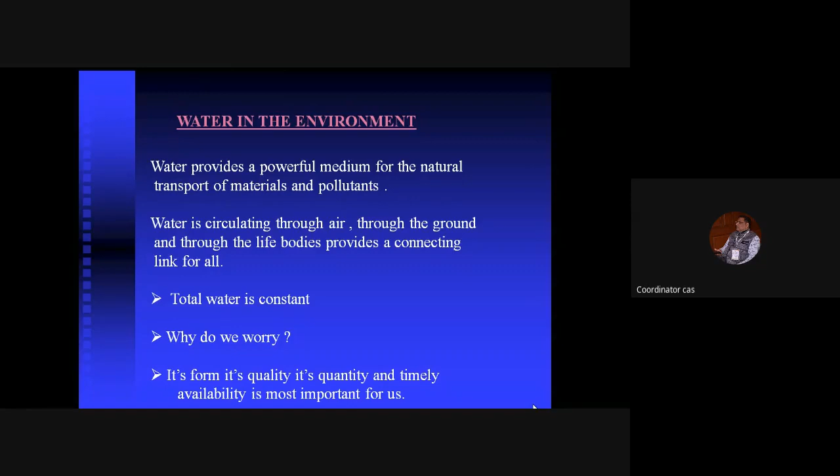Okay, let us go for the next slide. Next slide, please. You can see this is the hydrologic cycle. I think unfortunately I could not play it from here.

So the water evaporates from the seas. You can see the ocean to my right side - it is ocean MSL, representing mean sea level. From this ocean, a huge amount of water is evaporated due to the sun's energy. Not only from the ocean, even from the continents - you can see the continents with up and down topographic elevations, and trees from the many water bodies on the land, on the ocean. Every minute, every second, continuously, due to the sun's energy, water is getting evaporated.

You yourselves also - while I am talking, I am exhaling a lot of moisture. So like that, trees also give a lot of water when they suck water from the ground and then release water to the atmosphere - that is called evapotranspiration. Evaporation from the soils.

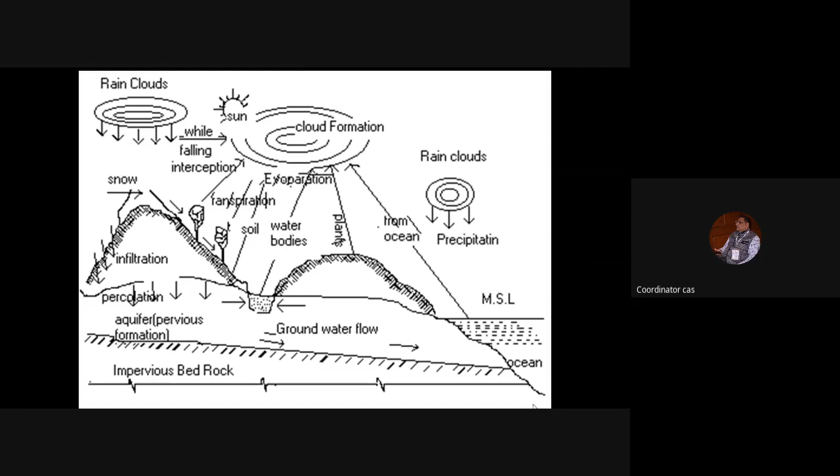We cannot bring the water from far away - I will show you sites later on. Okay, so let us have the next slide. This is just a glimpse of the world's water resources.

Of course, don't bother about that big figure, but look at the top - 97.2% of water is salt water, that is in the oceans, so you cannot use it. Though it is a blue planet, full of water everywhere, most of the water we cannot use. Of course, nowadays with RO and all, we can make it usable for drinking, but it's very expensive. For regular use like irrigation and other drinking or other uses, you cannot directly use that salt water.

So what is the fresh water on the surface? It's just 2.2%, out of which groundwater is only 0.6%. But out of the total fresh water, most of it now is in the glaciers and ice caps.

2.15% of fresh water is in the glaciers and ice caps, meaning most fresh water is in the north or south polar regions. Of course, the Himalayas are also called one of the poles because of its height and glaciers. These glaciers are getting melted, but still much of the fresh water on the surface of the earth is in the glaciers.

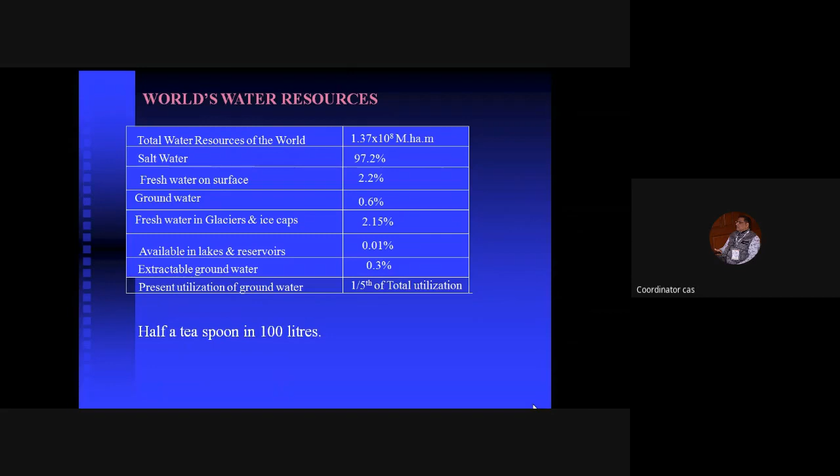Next slide please. Yeah, this is India's total water resources.

Mean annual rainfall has a huge variation. 1,100 mm is our average annual rainfall of the entire country, but it varies - sorry, 11,000 mm in Cherrapunji, not 1,100. Of course, Cherrapunji is no more the highest rainfall; normally we learn this from textbooks but the place has changed now. It varies from 11,000 mm somewhere in the northeast to just less than 100 mm in western Rajasthan. You can see such a huge variation - it is not uniform throughout the country.

That is why we need water management - we have to transfer water from somewhere under floods. Even the northeast gets floods; whether we can transfer from there or not is a different issue. The Ganga basin has some floods, even the Godavari has floods - any river basin has some floods, and there are some droughts. So it's not uniformly distributed - there's a huge variation, the spatial distribution of rainfall is not uniform. If the spatial distribution were uniform, there would be no need of any reservoir or supply structure - everybody would get equally and could simply have a small storage structure to utilize it. That is why we need dams, that is why we need structures and so on.

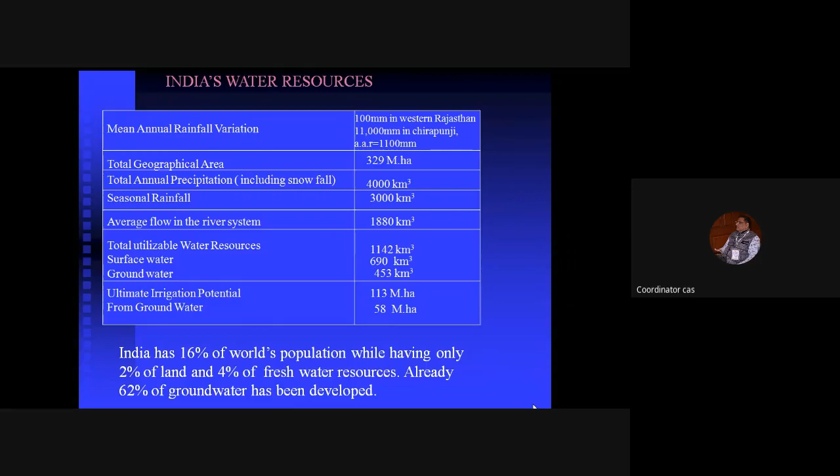Compared to the average annual rainfall of Saudi Arabia of about 150 mm, our rainfall is much higher. You've just seen 1100 mm. Saudi Arabia lives with much higher standards many times over, using desalination plants for drinking water and managing other needs. Israel is also similar, with almost the same amount of rainfall.

Whereas you are having 1.21 meters height of water above your entire land. But of course, most of it falls during monsoon, no doubt. Definitely, this calls for storage.

We have to save the environment, no doubt. But for those who say dams will spoil the environment, I cannot unfortunately agree. Dams do disturb environmental balance to some extent, but in India's case, there is a necessity for storage. The storage can be in smaller or bigger structures—that is left to you. Storage is needed because the entire monsoon gives 75% of the total rainfall.

As per international norms, per capita availability of water works like this: if it is 2000 cubic meters, you are coming to a critical position. If availability is 1000 cubic meters, that's very low availability, and 500 cubic meters is the critical lower limit. That is the per capita availability of water. Let us see how we fare, where we are.

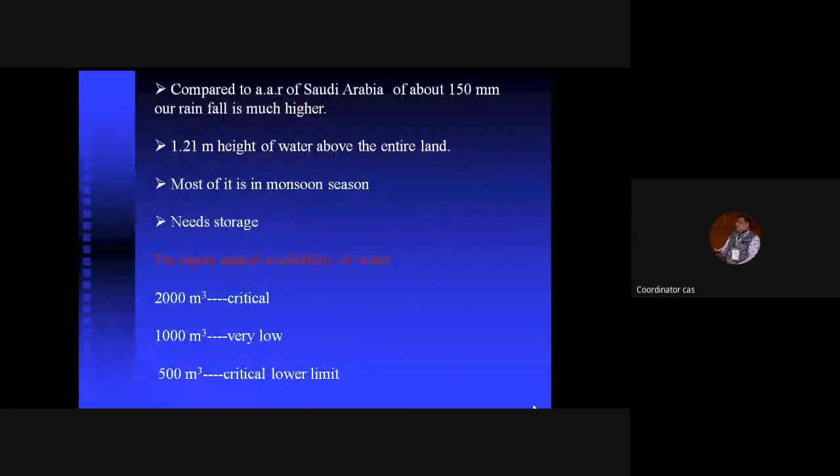Next slide, please... I think you might have skipped one slide ahead... Okay, go ahead, next slide.

Water allocation priorities in the National Water Policy—earlier 2002, let us compare with 2012. From time to time the government of India revises this. Water is a concurrent subject, meaning both states and the center have jurisdiction. State governments can act only within their own state's water resources, whereas the central government has overall control, stepping in whenever two states are fighting, and it can also fund various things. Then there's drinking water and irrigation.

You can see the main headings of the 2002 and 2012 policies. Earlier we were bothered about quantity allocation—mostly supply side management. Whereas in the National Water Policy 2012, many new concepts have come: the Water Framework Law, adaptation to climate change, demand management instead of supply side management, water use efficiency, water pricing, preservation of river corridors, and the rural and urban water divide. So there is a huge policy change.

Earlier, we used to supply whatever water we planned, constructing dams and doing so many things. But now we have to do all these things under the framework of a law, considering the environment, efficiency—how much efficiency you are using—and how much you are preserving our environment, what is the urban-rural divide, and so on. I can give an entire hour's lecture on this, but let us go further.

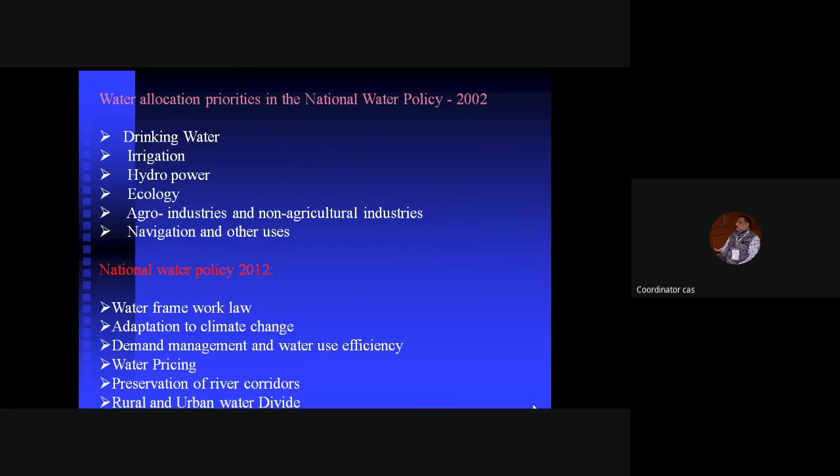This is a rainfall map - the blue color represents the highest rainfall over our country. The Western Ghats have very high rainfall, almost 3000 mm. The Northeast, the Ganga Basin, Mahanadi Basin, and parts of Bihar and Jharkhand also get high rainfall. Whereas here in Hyderabad, you are in a rain shadow region, so your rainfall is somewhere around 700 to 800 mm.

See how this Indian landmass gets rainfall. There are two types of monsoon. One is during this season - the southwest monsoon travels across India. One part directly dashes the Western Ghats, the other part takes a turn and travels across the eastern coast up to the Himalayas. That's why the Western Ghats receive maximum rainfall, and as it travels across the mainland and touches the Himalayas, the Ganga Basin and even central India get very good rainfall. Because of the Western Ghats, much of the central Deccan Plateau has a rain shadow, meaning less rainfall. This is how we understand it.

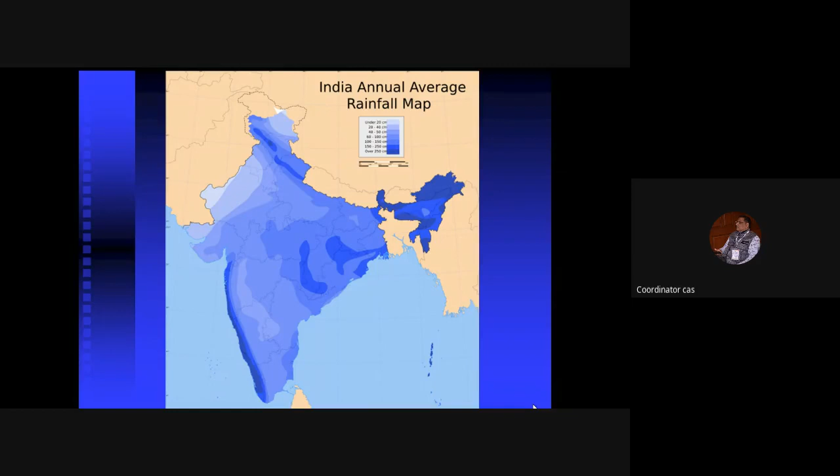Let us go further. Next slide please. You need not bother much with all these figures - only per capita surface and groundwater put together, how much is available in each basin. The highest basin availability now is Brahmaputra. But we cannot use this water properly because it flows in a very high land. Next one is Godavari, but even Godavari's upper reaches are very much stressed.

Most river basins, as we have seen, have less than 2000 cubic meters per capita availability, which is critical. Most basins in India are already under critical stage. On average you can come out as more than critical, but that average is total - at a particular place, for example even in the Godavari basin, the upper parts are highly stressed for water.

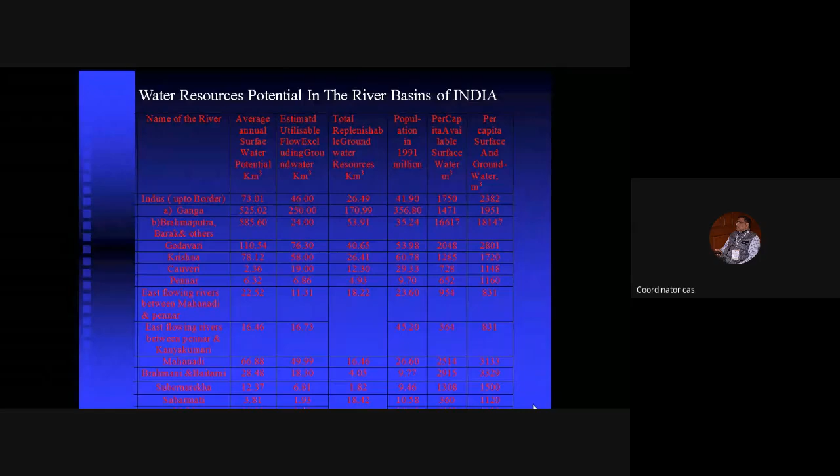Next slide. Average is around 2,731 cubic meters in overall India. You can say it is not stressed, it does not come under critical, but that is not happy everywhere - somewhere it's something less, even less than 100 cubic meters also. Anyway, this is the situation.

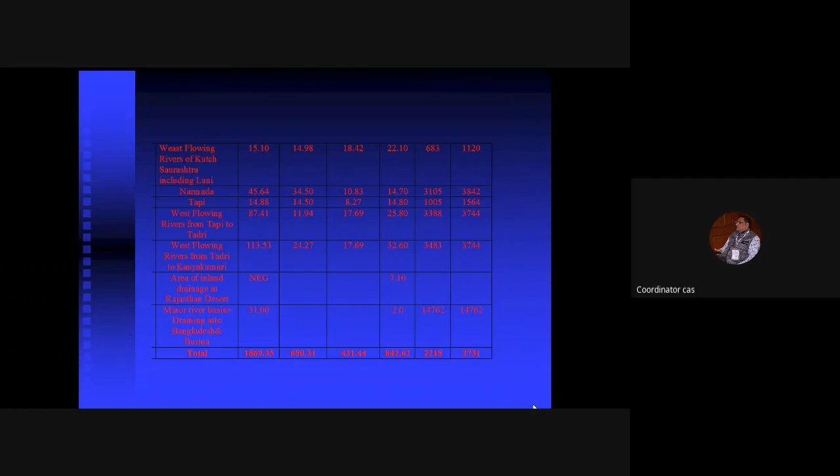Next one, we have to charge up. So much of the water is concentrated in the Brahmaputra-Barak basins, which you cannot really exploit because it flows in a very high elevated area and joins the Ganga. It is much lower in Bangladesh, and a lot of flooding is created there. But today there are technologies to tap it - people are trying, but that is still far away.

Total utilizable water resources are 690 cubic kilometers out of 1869 that is flowing in the entire rivers. Present utilization is still only 174 or a bit more, around 200 cubic kilometers. So out of 690, we are utilizing only around 200 - much is not utilized, still flowing to the great seas. Even in Zambia-Zimbabwe, one single dam stores around 180.6 cubic kilometers - that's all our total storage put together. Even Egypt's Aswan Dam stores around 162 cubic kilometers. So we are still storing very little, my dear friends, please understand.

Even in the less stressed basins, upper reaches are stressed, as already told. Of course, in some places like Assam or other places, too much water is a problem. So next slide please.

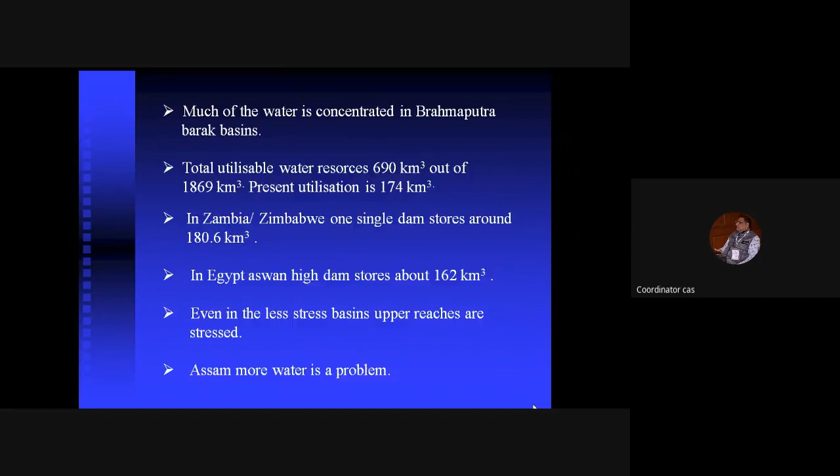Anyway, next - US and Australia can store around 5,000 cubic meters per capita, just for comparison purpose. Mexico, China - these are middle income countries; China is now developed even better than South Africa sometimes, and Mexico too. So they can store 1,000 cubic meters.

Developed countries store around 5,000 cubic meters per capita, whereas middle income countries store 1,000 cubic meters. But India is still storing only 200 cubic meters per capita. So there is a lot of scope, whether in the form of rainwater harvesting or construction of small or big dams, whatever you want to do. I am not advocating for big dams or small dams. The only thing is you have to store, you have to catch the rainfall. There is every indication that the need for storage will grow because of global climate change.

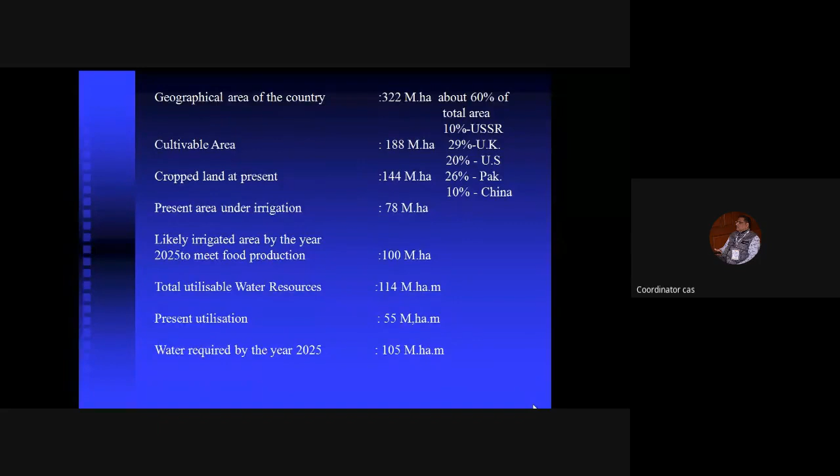So crop land at present is only a little bit more than this, maybe 150 to 160 million hectares. Present area under irrigation is around 100 million hectares or so. I think the likely irrigated area, as we approach 2025, is almost 100 million hectares. But total utilizable water resources is only 114 million hectare meters. You cannot utilize more than this, already I told you, because of various reasons. Present utilization is still only around 60 to 70. It's not that much. We still have to utilize these water resources. So required water by 2025 is 105 million hectare meters. We are already at 2020. So that means... next, please go to the next slide.

Meanwhile, I will tell you, we are going to have very huge water storage needs. We have to do it, and then irrigate, and then produce the food. Actually, the present population of the country is not 1,000 million now, it is 1,300 million, meaning 1 billion plus 300 million now. So the population was already estimated for 2025, but we have already crossed this figure. So when you are estimating like this, going on, we need to produce accordingly.

Now we are producing just a little less than 300 million tons, whereas we require by 2025 around 350 million tons. And our present status of food production per hectare in irrigated areas is around 2.2 tons per hectare, which is less. Yet, of course, in Punjab they are producing more than 4 to 5 tons, whereas on average it comes to 2.2 tons. This is a very important figure: 0.75 tons per hectare for unirrigated land. Why am I telling you this 0.75 figure is important? Because even if you harness each and every drop of falling water, you can provide irrigation only to 30% of the cultivable land. The remaining 70% of the land is under rain-fed agriculture only. This rain-fed irrigation is very much important apart from the irrigated land. That is why, unless you increase productivity under rain-fed conditions, you cannot meet the food production requirements.

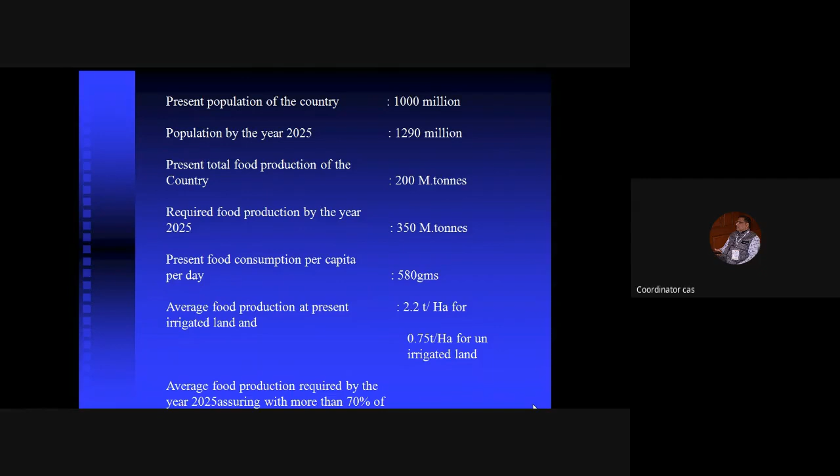Okay, let us go to the next slide. 80% of world fresh water is used for producing food. See how much water we are utilizing to produce this 80% of world fresh water usage. For example, if you are eating a kg of rice, you have to use 1,000 kg or 1,000 liters of water. A t-shirt takes 4,000 liters of water to get produced. This is called virtual water. What is green water? Water in the soil is called green water, and it constitutes 70% of the fresh water used for producing food. Most of the soil water is used for producing food.

Blue water that is there in the rivers and aquifers constitutes around 30% of the fresh water used for producing food. Of course, grey water is the wastewater, that's what virtual water I told. 1,000 liters of water is required to produce 1 kilo of staple food. Okay, this is how the present water footprint of human beings.

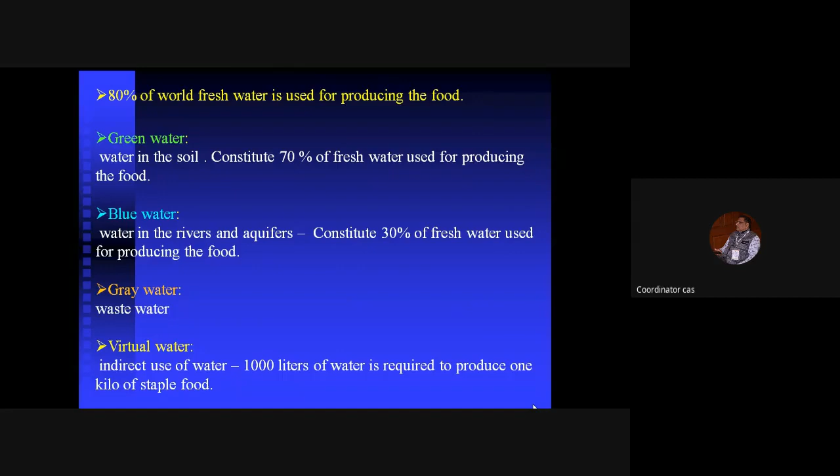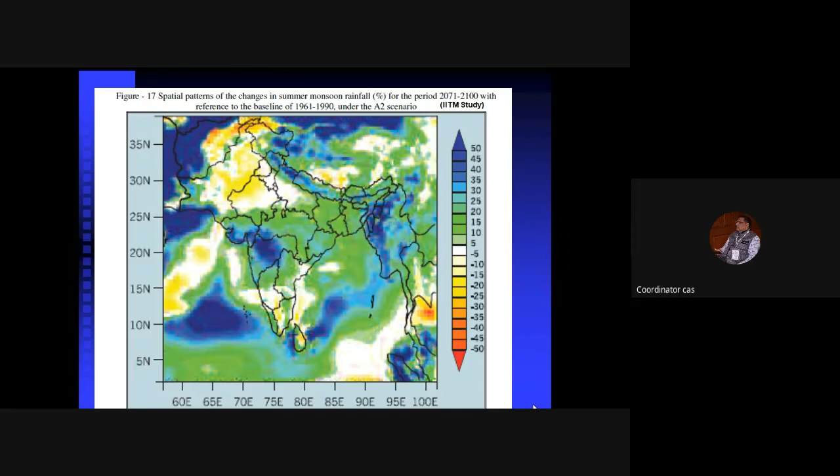Next one. This is what is known as extremes in monsoon. Just now we are discussing - extreme events are increasing. Droughts are also increasing, floods are also increasing because of climate change. I need not read all those.

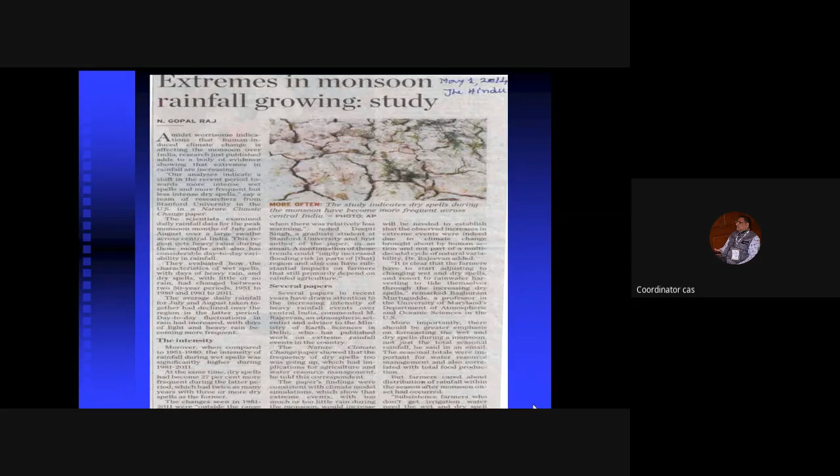Okay, next one, please. This is what is our usage pattern. See the blue line, which is known as groundwater - this groundwater goes on increasing. You can see the blue line. Whereas...

this pink line, which is surface water, we are not able to tap much of the surface water over the years, though we are constructing dams this way, that way, so many dams. But some of the dams were silted up, and in fact the runoff has reduced, and the reservoir capacity has also reduced. But overall, that maroon line goes on increasing. That means in the last 3 decades, whatever water we are drawing is mostly from the groundwater, not much from the surface water. This is a very interesting statistic.

Whether you believe it or not, much of our groundwater has been utilized. This is not good for the country, this is not good for the environment. This is what we try to inform you. Next one, please.

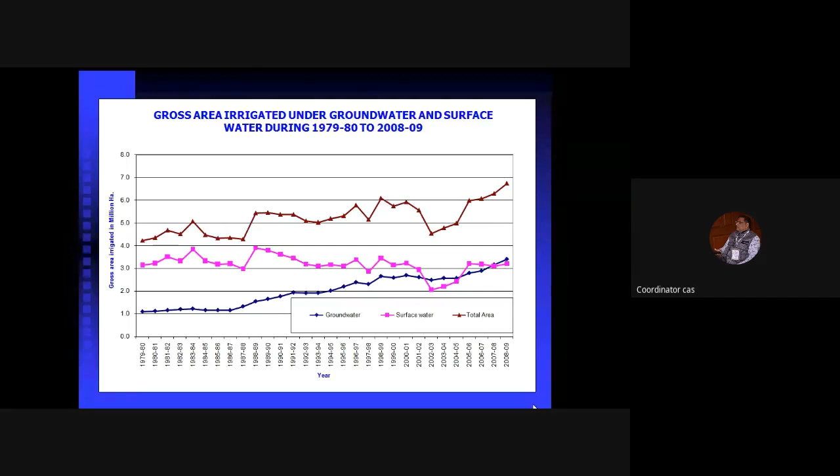Yes, 30% of India's power is used just to pump the groundwater. A lot of subsidies are given to farmers without any power bill - the pump can be connected, and then they are pumping. Power utilities become bankrupt. Of course, those figures are very long back.

Now, because of this power - what did the government say? We'll give the power bills, but they don't give to these discoms, so they get into losses. So this booming groundwater economy, that is not correct.

We have to save this groundwater. How do we save this groundwater? By reducing the consumption in agriculture. How do you reduce the consumption in agriculture? By adapting to highly water efficient methods. If you just save around 15% in agriculture, that means in irrigation, you can flood the entire cities with drinking water. So intelligent power supply pricing needs some kind of management here.

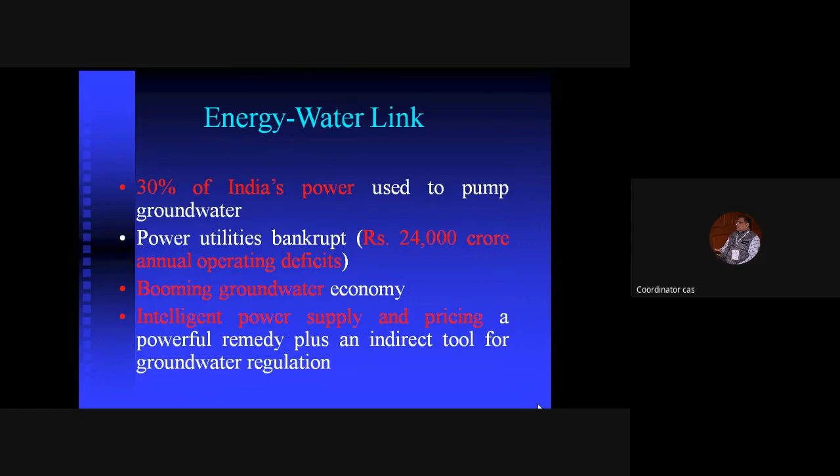Now coming to your sector, urban water supply. Most of your planners are working in urban India; fewer are working in rural India. Anyway, let us see this population figure in millions and the urban population.

Many of you know better than me that our urban population is increasing. More than 50% of our population is going to live in big cities. So what is happening? Its effect is that traditional sources are sinking.

Take Hyderabad for example. Once upon a time, Mir Alam tank was the source for drinking water. Then we went for Hussain Sagar at the midst of the city, but now it is no more a drinking water source. Then we went for Himayat Sagar and Osman Sagar, but they also provide a very small amount.

Now we went for Manjira, we went for Krishna, we went for Godavari. So traditional sources are sinking as the population increases and the city grows, and we have to bring water from very far off places. That is the result.

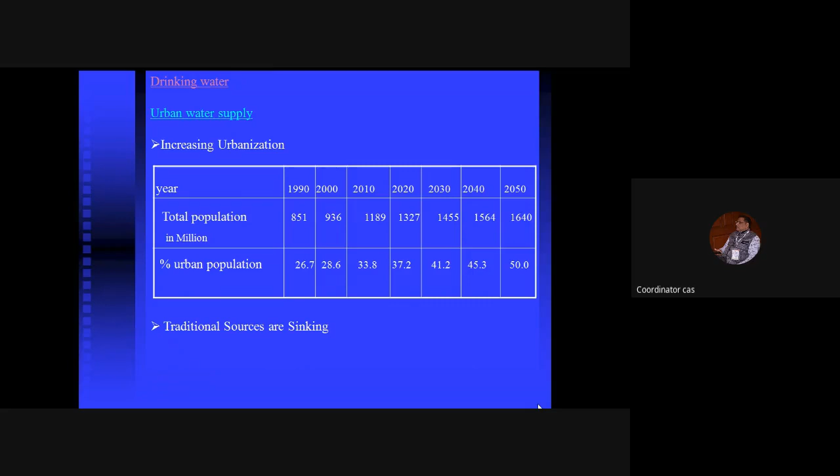You can see Bangalore getting water from more than 100 kilometers away. Ahmedabad gets water from river Sabarmati, 150 kilometers. Delhi is similar. Even Chennai gets drinking water from Telugu Ganga, 400 kilometers away. Imagine the impact of this. Mumbai is lucky; they have a better source there.

When you bring water from such large distances, what happens? Even just by leakages and at the tap, most of the water is wasted. 20 to 40% of the water brought from such large distances is wasted at the house. Why don't we fit proper fittings to make this water more efficient for utilization?

It's a foam-like thing. If you get it fitted on your tap, there are fittings like that. We can save much water.

Then when you come to recycling of water, it is very paltry. Mumbai is not at all properly recycling. Maybe these figures have to be upgraded, but because the sea is very near to the city, they are throwing it away. Delhi is much better, but still not up to the mark. Chennai also not good, Hyderabad also not so much.

In Hyderabad, less than half of our sewage is being treated, and we are not putting it back into service. We are simply leaving it to the ground. So here is a lot of scope to save water by recycling our waste. This is very important.

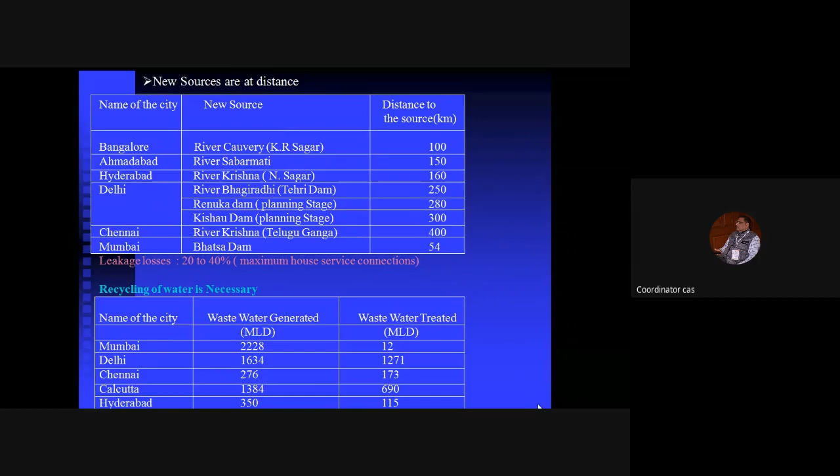120 liters per capita per day is used by our central agencies for urban water supply, but I feel it is a little bit higher. When I calculated at my own household, we are taking around 80 to 100 liters.

What is happening is 20 to 25% of treated water is wasted. Due to pipeline leakages, altogether 30 to 35% is wasted, while the major drinking water pipeline is running through several localities and villages because we have to bring the water.

Our Krishna pipeline comes all the way from Nagarjuna Sagar to Hyderabad. In so many places, people simply pierce it and tap the water. So if you don't provide drinking water to that particular locality, they will attack your pipeline. This is what is happening.

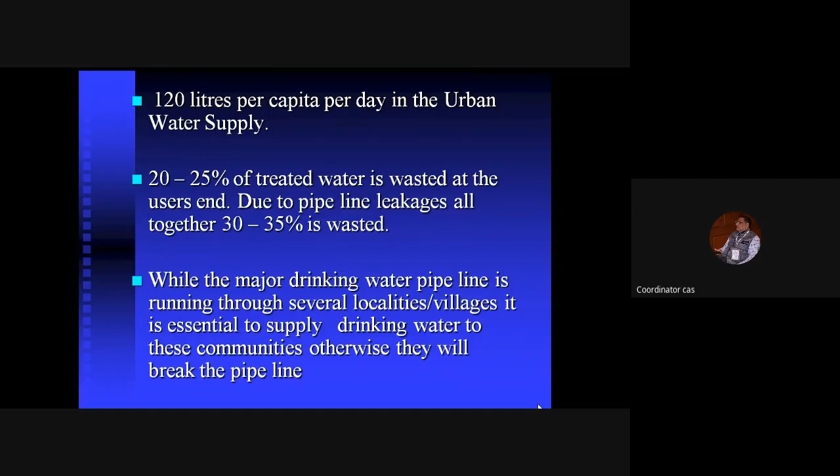1 out of 3 in the developing world lacks access to safe drinking water, but today the situation is much better overall in the world. In India, the accessibility rate has now been increased.

2 out of 5 lack sanitation, resulting in 10 million deaths every year. We talk about deaths due to coronavirus, deaths due to cancer, but sanitation is still not good. If there are 5 people, 2 people lack proper sanitation, resulting in 10 million deaths every year.

It would take less than 5% of the world's military expenditure to meet the basic water and sanitation needs. So let us go to the next slide.

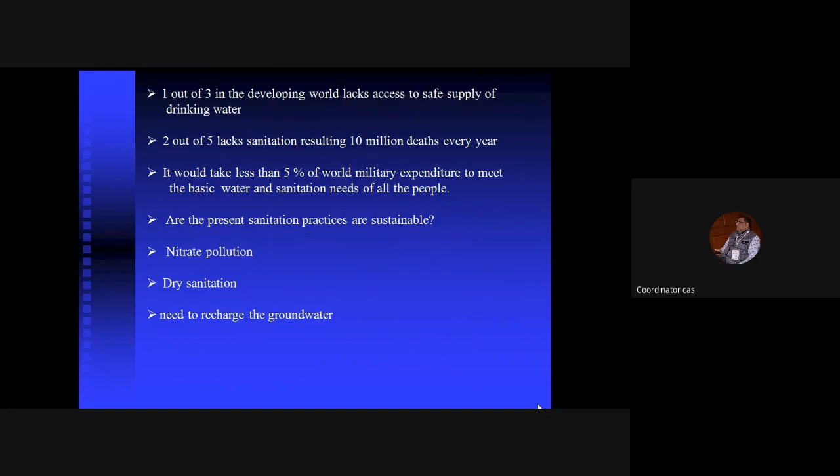Issues: water leakage from houses, particularly from overflowing sumps. My dear friends, many of you have your own permanent houses. Many times your sump gets filled and overflows, leaking onto the road. People don't even bother to connect a small float, damaging the roads.

And we club the drinking water requirements with other domestic uses. We are using the same water both for drinking as well as other domestic purposes, including washing of the car, washing of the corridor, and many other things.

That is not the wise one.

Then urban flooding, basically due to choking of drains. Even nalas are choked, all these drains are choked, concrete cover of the catchment, occupation of water bodies. Many of these water bodies in the city, earlier used to hold some water, but they cannot hold now because most of it is being occupied and water is let out. That is why you are having flooding. Needs to revisit the drainage design. We have to upgrade it, rethink it in view of urban flooding and because of climate change and so on.

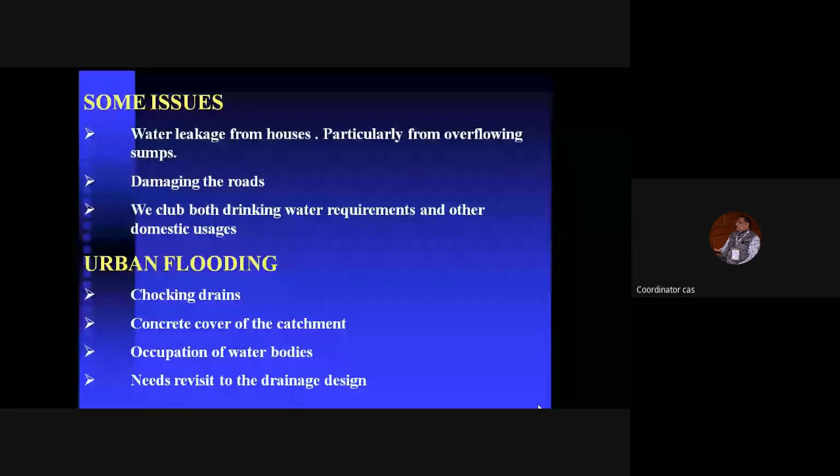Next one, please. You can see there is a quality problem also. I cannot concentrate now on the quality problem because a lot of groundwater particularly is being polluted because of nitrate pollution, which is very widespread. Naturally fluoride and arsenic, that is the cases, everybody knows. I don't want to concentrate on that.

But because of more urbanization and more utilization of fertilizers, nitrate pollution is one very important issue. And blue baby syndrome, and even holes in the heart, if you drink water with nitrate high. Normally nitrate should be less than 45 mg per liter, but now everywhere it is 80 mg per liter. This is a very dangerous signal.

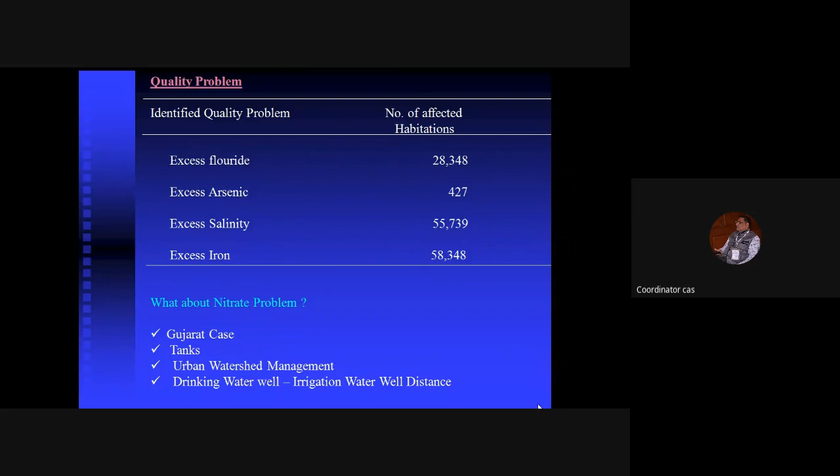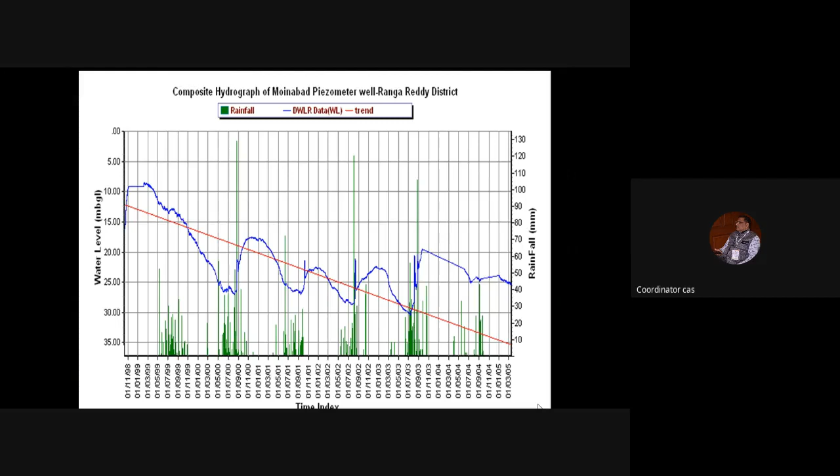Okay, next one, please. You can see how the groundwater we are pumping. We have digital water level recorders, and you can see the water level, that red line, is going down. Next slide please, we can catch it up to the time.

Every house must have a recharge pit. How many of you are having houses? Sorry, how many of you are having recharge pits in your houses? Very few. In every meeting, if I ask this, hardly less than 10% raise their hands. Virtually I can ask you, how many of you are having recharge pits in your own house? Next one, please.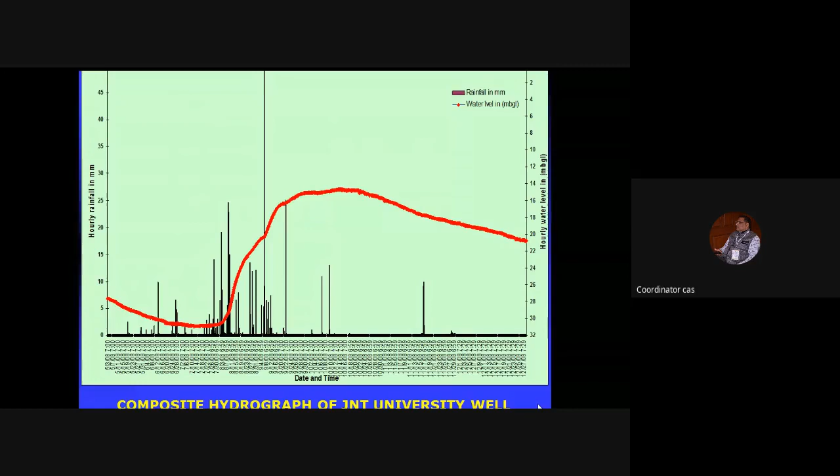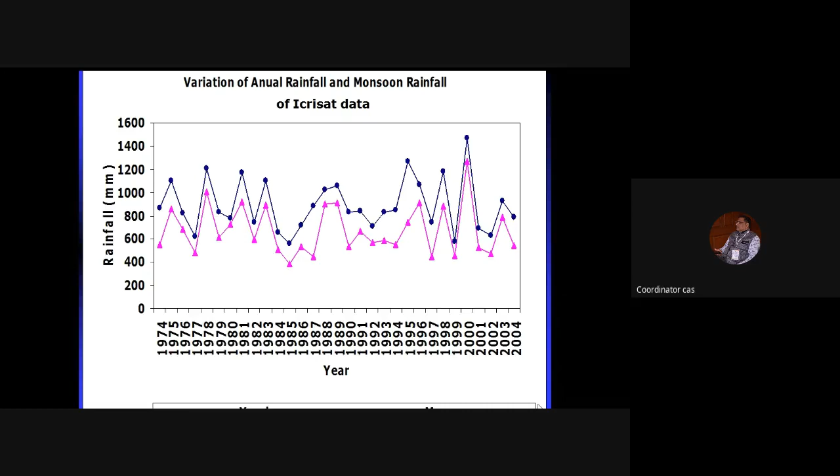This shows the variation of annual rainfall and monsoon rainfall. As already discussed, 75% of rainfall occurs in just 50 days of rainy days in the monsoon. So you have to catch this rainfall through rainwater harvesting. We have to. Go back. Yeah, right, keep it.

You can see, in one of our projects, we picked up samples all along the groundwater along the Musi. You can see urbanization, how it is reflecting. TDS is increasing as you come into the urban world. This is the outskirts of Hyderabad, that is Vikarabad, Chevella area. The moment we enter...

Ramannapeta, Rajendra Nagar, then TDS is shooting up like anything. And once the entire city is crossed, then TDS is falling. That means by urbanization, you are polluting very much. In between there are industries, you are polluting much, and again. So this is the baseline, this side and this side. In between, you are simply polluting, giving a heavy load to the groundwater pollution.

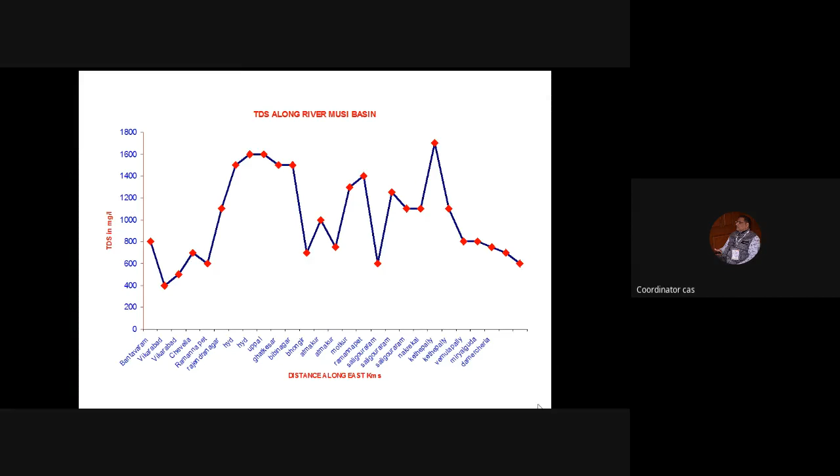Next one, please. Please change the slide. Not only TDS increase, heavy metals are also increasing. For example, this is how it goes: first it embraces the soil, then sediment in the lake, and then it reaches the groundwater.

But what is happening? While in the soil, it's limited to certain parts only. In the sediment also, certain parts only. But when it reaches the groundwater, it is very widespread. This is what is happening. So when you just throw some waste on the soil, you think the soil will eat it away, but no, it just passes on to the groundwater. So the groundwater pollution is highly widespread.

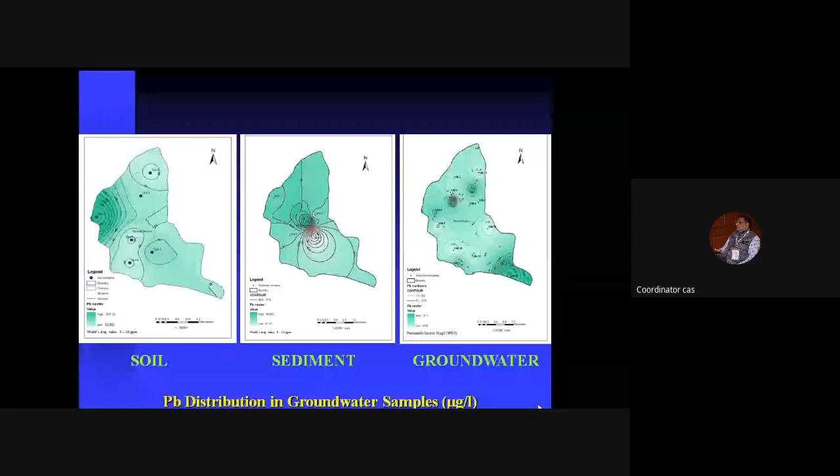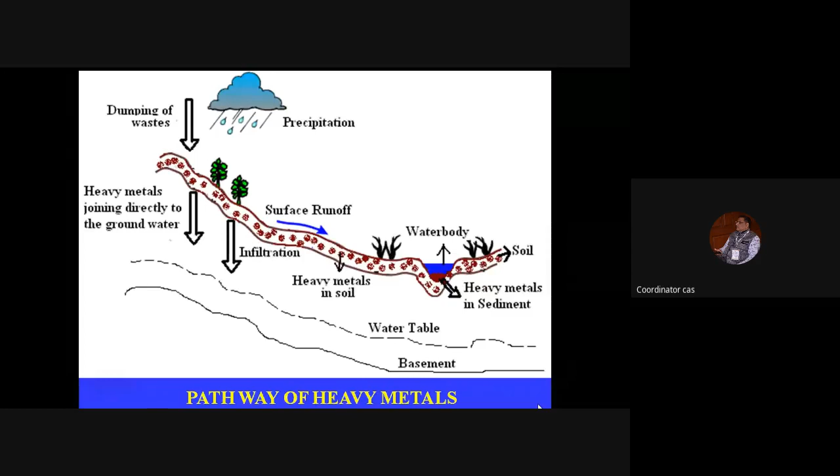Heavy metals are very dangerous, and you will be getting cancer from them. Cancer cases are increasing. So this is the problem. We see an increase of cancer hospitals also, cancer patients also. Okay, next one.

That is a dumping of waste on the soil, and then directly it is going to groundwater, surface water, and then sediments. This is a pathway.

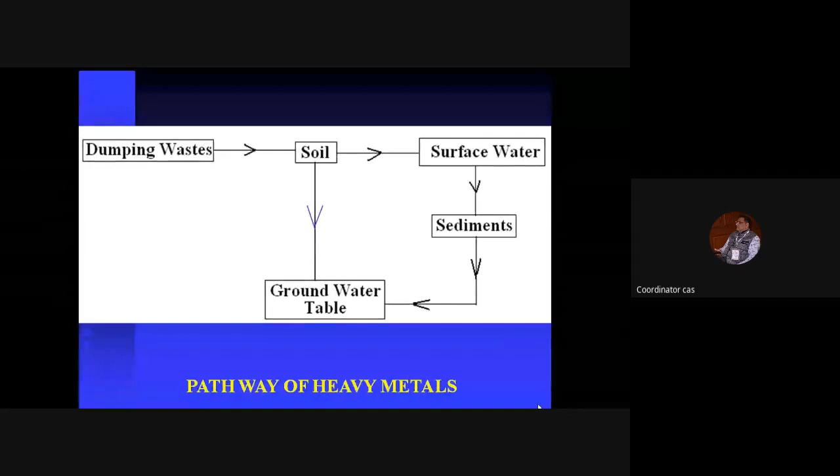Need for artificial recharge. This is very important, where you can plan to overcome the inadequacy of water to meet our demands. Whatever water is going as runoff, you can simply catch, arrest, and recharge to the ground, particularly in the cities, because you have already seen pollution, lack of sufficient quantity and quality. So all these things we can arrest, and we can aid in supplying quality water by recharging artificially.

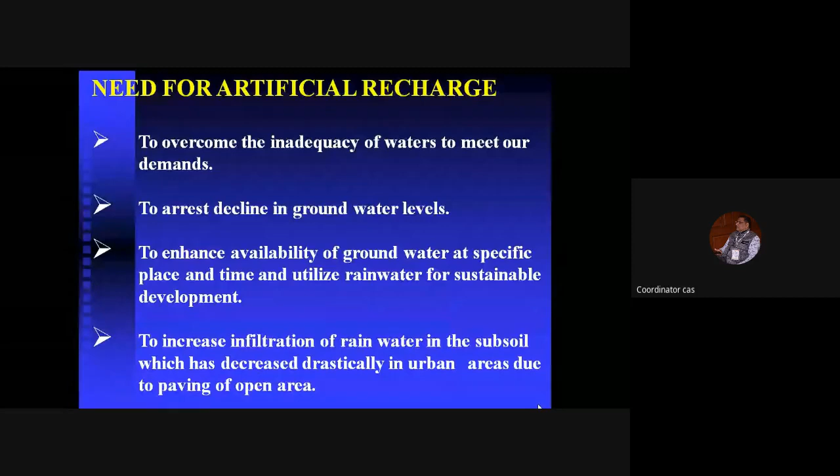To enhance availability of groundwater at specific place and time, utilize the rainwater for sustainable development. To increase the infiltration of rainwater in the subsoil, which has decreased drastically in urban areas due to paving of open areas. Many places we are making concrete jungles, and we are not allowing the water to seep down.

What is needed to improve groundwater quality by diluting it? If you send more rainwater into the ground, you can dilute that groundwater which is already contaminated, but you can utilize it later on. To increase agriculture production in rural areas, and to improve ecology of the area by increase in vegetation cover, etc.

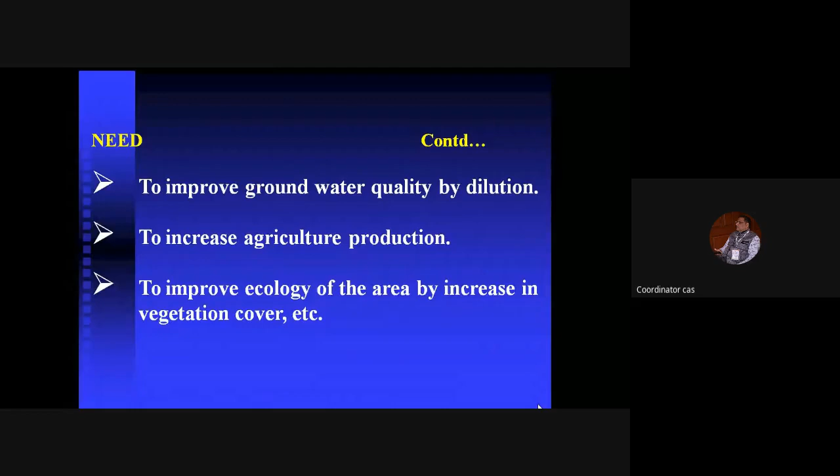Normally we think we are alone living on this earth, but along with you there are so many creatures living. Groundwater and surface water are not needed by you alone; there are so many people, so many creatures. So advantages of artificial recharge: cost of recharge to subsurface reservoirs is much lower than surface reservoirs. The aquifer serves as a distribution system. When you are recharging the ground, it spreads over a very wide area, not just one location. No land is wasted for storage purpose, no population displacement is involved, and groundwater is not directly exposed to evaporation. These are some advantages of recharging.

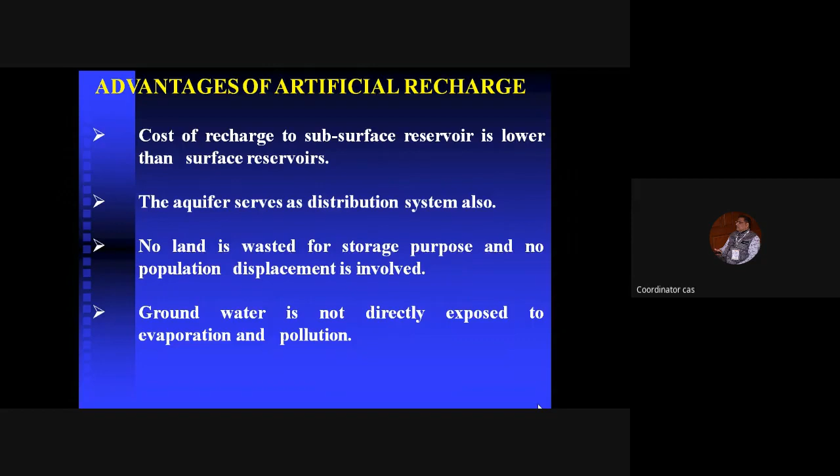Storing water underground is environmentally friendly. It increases the productivity of the aquifer. Once upon a time your borewell is not functioning properly because there is no water table. Now, if you recharge and bring the water table up, your borewell starts functioning.

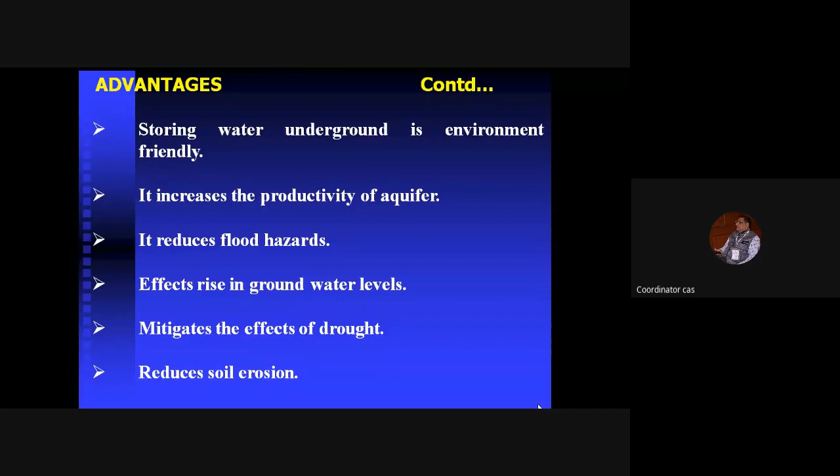It reduces flood hazard. Urban floods can be reduced. Effects of rise in groundwater table can solve many problems and mitigate the effect of drought also. During the drought period, you can use this groundwater back. It also reduces soil erosion. Many times soil erodes and you lose important soil.

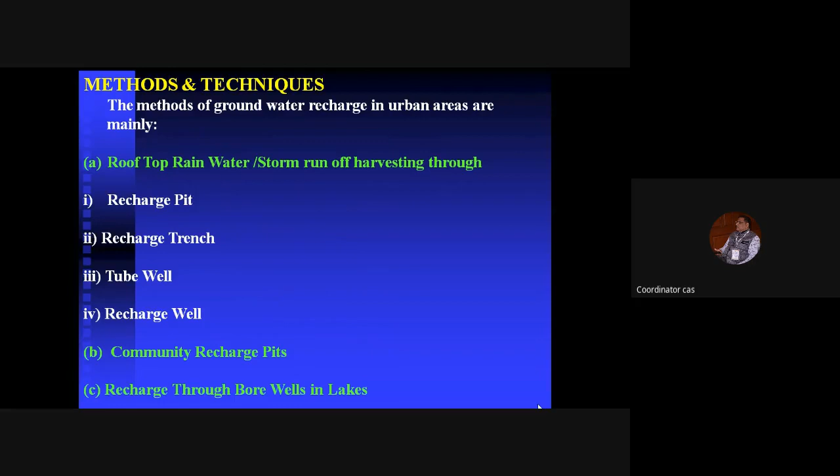Methods and techniques for recharging. The methods of groundwater recharge in urban areas are mainly rooftop rainwater and storm runoff harvesting through recharge pit. I was talking about recharge trench - these are different names, but the fundamental principle is to recharge. Through tube wells also you can recharge. Community recharge pits are also very important, though so far we have not started those. Recharge through bore wells in lakes and reservoirs is also possible.

These are some figures approved by the Central Groundwater Board, which you can think and provide. You can see each house has a rainfall water rooftop, with a pipe taken from the rooftop put into some kind of recharge pit, where the pit has gravel, rubble stone, and sand arranged. We can discuss these things further.

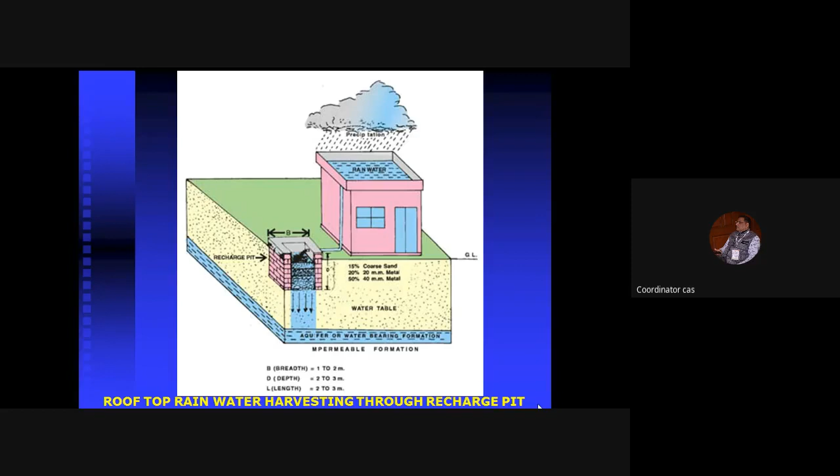This is one model, but it's not necessary that you always adopt this model. This is an example where, along your site, if your site is bigger, you can recharge all along your site - this is called a recharge trench. Earlier you saw the recharge pit. These are simple things you can adopt in your households.

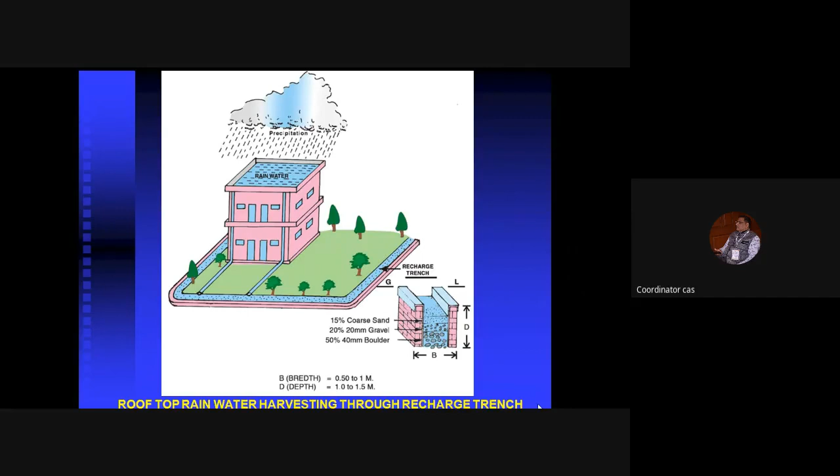This is an apartment site example. Many of you are designing apartments - you should necessarily have a recharge, a bigger recharge pit here leading into a smaller desilting tank or some kind of treatment, and then put into a borehole to deeper aquifers. You can recharge using very simple techniques.

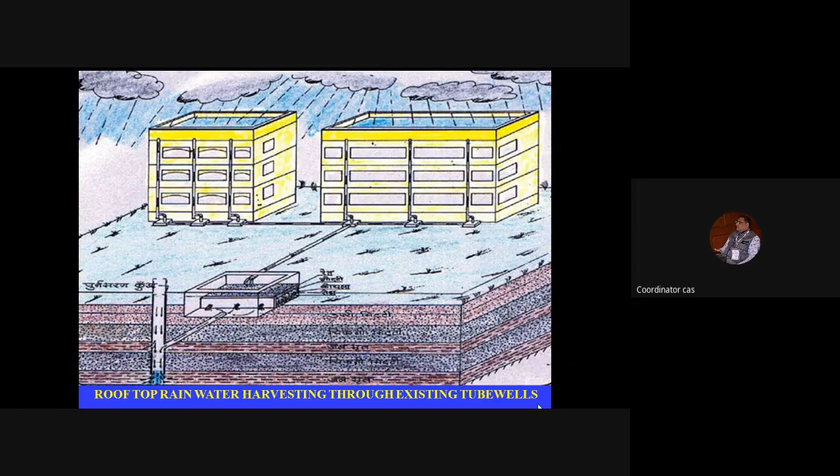In a very big complex, you can have a recharge well. This is how there is a filter here, and then two wells you can recharge. These are all some models available on the CGWB website also. We can provide also, no problem, this kind of things.

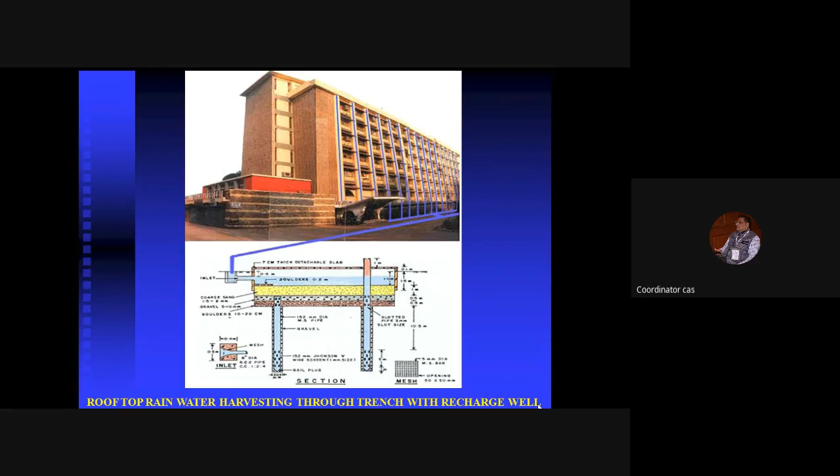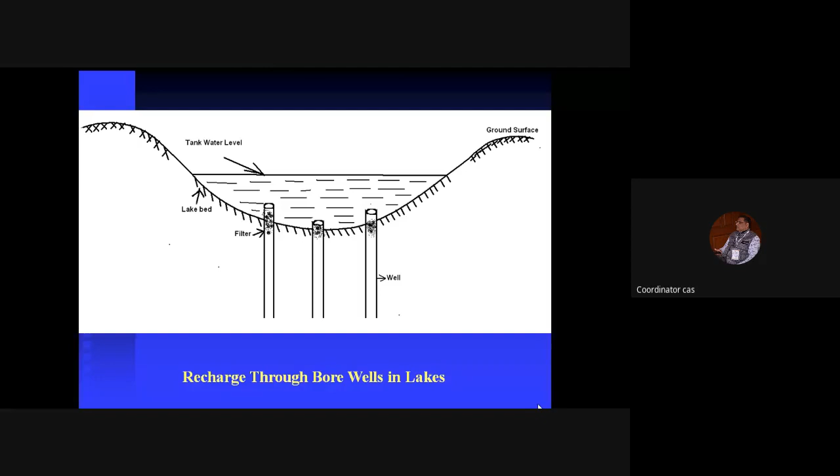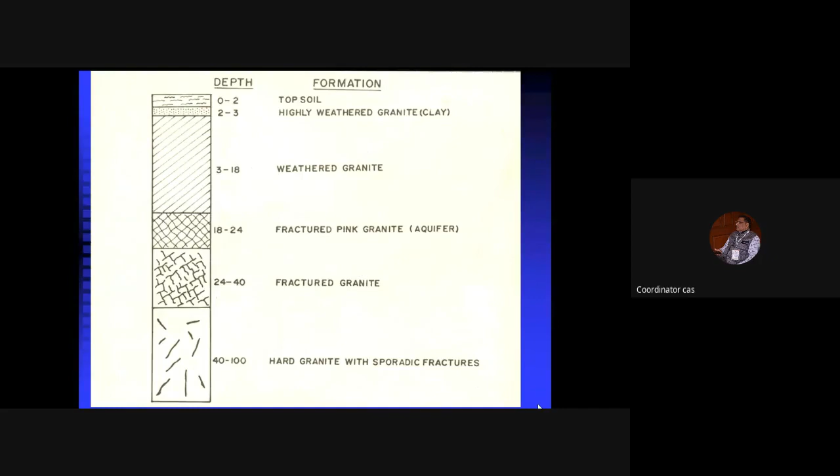Without a gap like this, they are all filling up to the brim. What happens when rainwater comes? It simply passes away by filling this gap and then going away. But it should be stored - there must be a storage facility. You can build side walls, have a manhole cover and so on. Within your house, it hardly costs less than 20,000-30,000 rupees. In fact, the government of Telangana, and even Andhra Pradesh earlier, were giving some concession also for this. Please build these recharge pits.

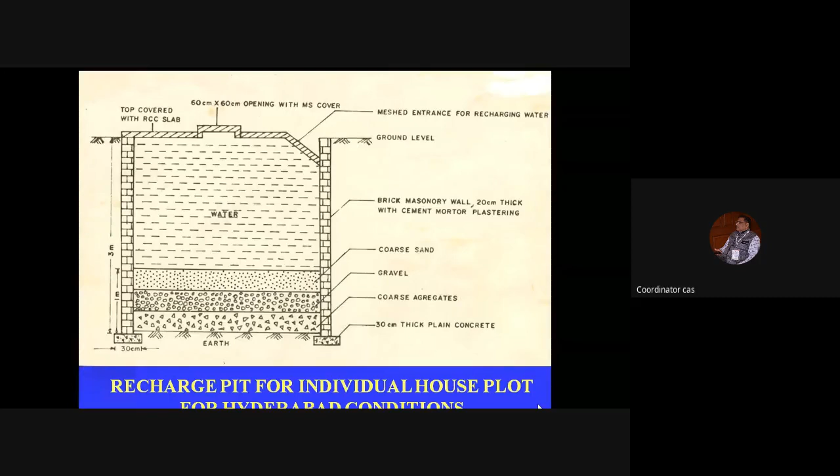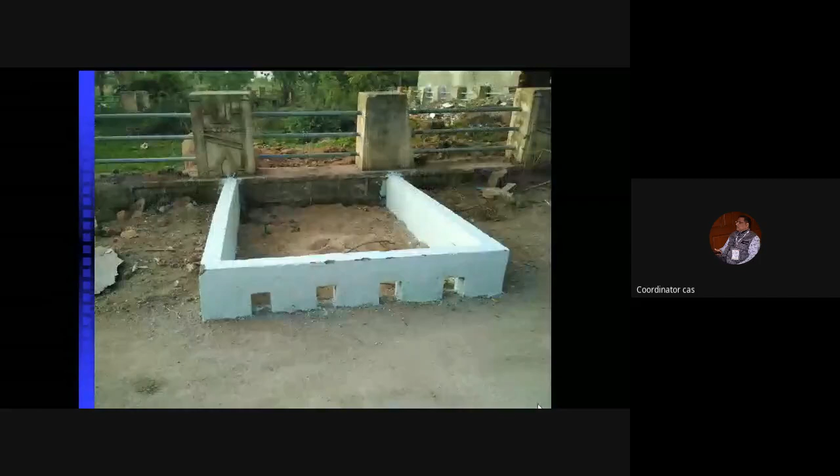See what is there, how much they are filling - the water, first of all, is not even entering. And everything is filled, and if it's smaller rains, it's okay. But with bigger rains, it simply gets filled because the infiltration capacity is not much compared to the rainfall intensity, so it goes away. These are some of the lacunae in recharging. Many times I was a member of the committee constituted by the Honorable High Court - we gave recommendations also, on how much the rooftop area is, how much rainfall is, how many cubic meters of water can be harvested from the rooftop.

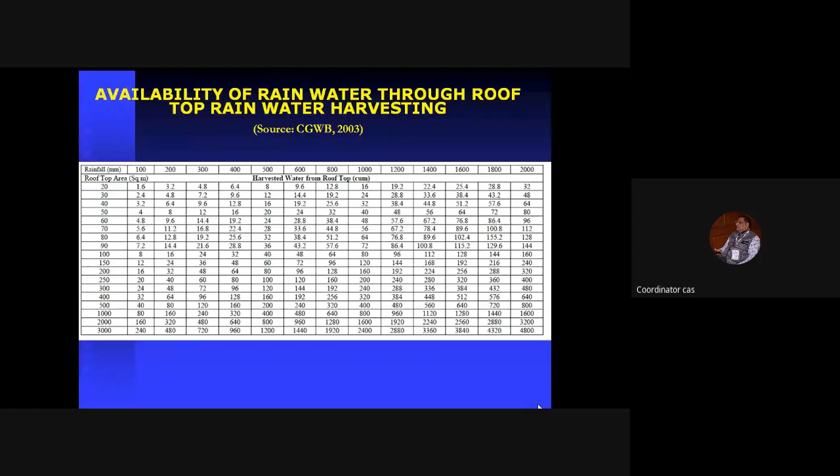All these details are given from the CGWB website, Central Groundwater Board. You can just download them; you need not bother about these calculations. By intuition, you can just construct the pit, direct all the rooftop water to one corner, and then recharge.

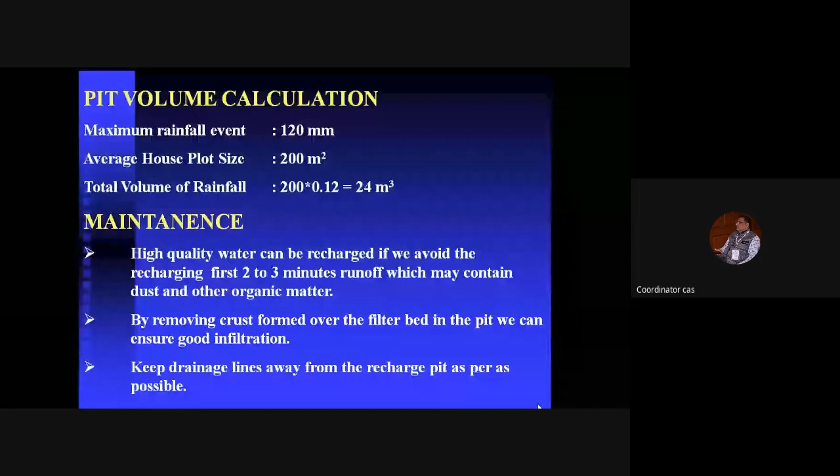So, working principles of groundwater governance. I think I will avoid going in detail since there is no time. The first principle is groundwater should not be managed in isolation. It should be used to cover variations in surface water quantity and quality as well as groundwater.

The second principle: groundwater quality and resources need to be harmonized with land management. Land management planning is very important, as recharge, discharge, and pollution of groundwater is linked to all this land management. That means as planners, before you plan so much, please think about the groundwater and surface water there. The third principle is governance of subsurface space, which is what we are talking about with recharge.

The fourth principle needs vertical integration between all these things, at national level, local level, and personal level. The fifth principle is that it should be linked to macro policies of other sectors such as agriculture, energy, health, urban and industrial development. All these policies should converge with water and groundwater.